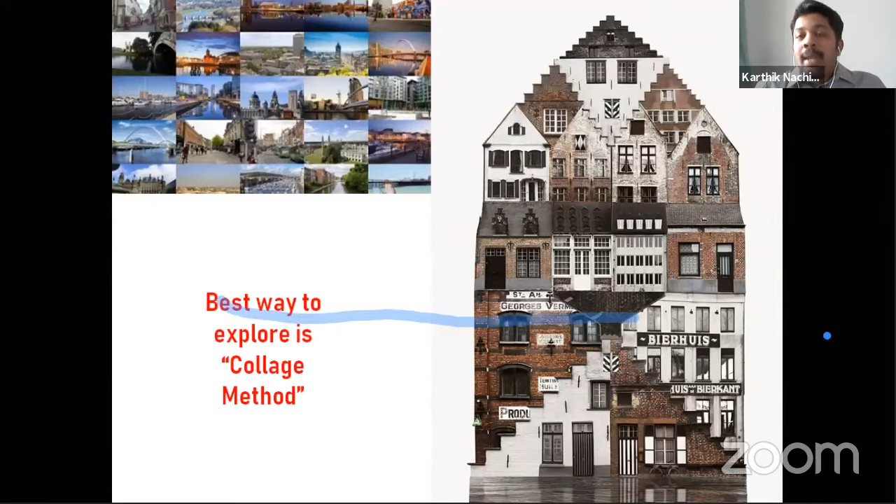What happens is we stay in a 3-star hotel and tend to take their services as a charge. Say, for example, in the morning they provide us breakfast, so we miss out on the cuisine in that country. Then probably they offer us a cab and take us to spots close by, or probably the best spaces they can explore in a day or two. So this is what usual travel offers us. But the collage method can make us explore different ways of understanding a city, and in fact, it makes us comprehend what architecture and urban environment should be.

So today, without delaying, I'm just going to take you to the first city. It's more of a photographic tour, so some of the best pictures I have collated to showcase you. With the time restrictions concerned, I'm just taking you through a quick tour of what I have learned.

Without delaying, the first country I'm going to talk about today is Netherlands, and I guess most of you have been to this beautiful city of Amsterdam. Amsterdam has a lot to offer us, and the moment you get out of the station, this is the first picture you see. Unless you travel by airplane and get to Amsterdam by train, this is the first thing you see.

It's a beautiful Gothic Renaissance revival architecture that the city offers at the bank end. The city is full of water. So once we get down, this is the first spot we see, with this facade with the Pantone color, large windows, spires. It gives us a memory or nostalgia of what Gothic and mid-century Dutch architecture was all about. Then straight away from the station, we see this beautiful tram.

There are many European cities that offer tram services, and one of the best tram-friendly services I have taken is in Amsterdam. Before we explore, Amsterdam is a city you can actually reach by foot, so the first thing you need is a map of it. Especially as an urban planner, it's most informative to get a map to explore a city, or as a tourist as such.

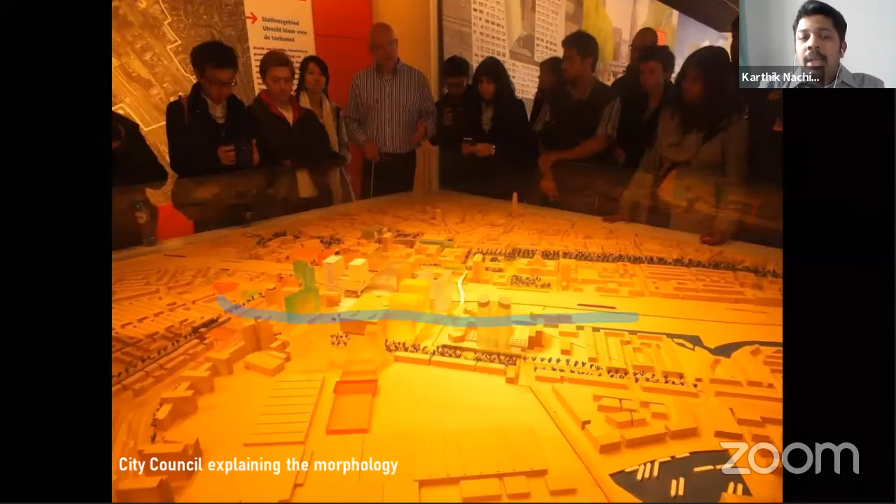So I keep wondering why we have a lot of potential in many developing cities, but we do not produce these kinds of models for someone to understand a city. And these models are kept in the city council itself for public view.

One can never miss these kinds of buildings in Amsterdam, especially in many Central European cities, especially after the Renaissance architecture. More than 16th and 17th century buildings follow this typology, a live-work typology. So this is a beautiful canal picture where I took it. Canals is actually living in Amsterdam. It is a city of canals. Even today, when you see a Google map of Amsterdam, you see water, water, water everywhere.

So this is one such interesting picture. Though the height restrictions are to a similar scale, you could see in the front facade, the picture towards the right, that shows you a group of retail buildings like cafes, pubs, and things like that on the ground floor, and you have residential rental living on the above floor.

This is actually a readapted typology from the previous days of Victorian houses, where they used to have the work or shops on the ground floor. They used to live on the first floor, and the topmost attic usually has the workspace because usually the workshops or workspaces need more direct sunlight. So the top floor usually has the workspace. That typology is being readapted in modern ways.

And the picture towards the left shows you a beautiful view of a canal, and especially those arched colonnades you could see towards the bottom are basically the entrances to the warehouse. This is where people used to stock their goods, especially coming from the sea waters. It gets into the canal system and gets to individual parts of the house. And you can also see a lot of boat parking areas close by. So this is how Amsterdam is.

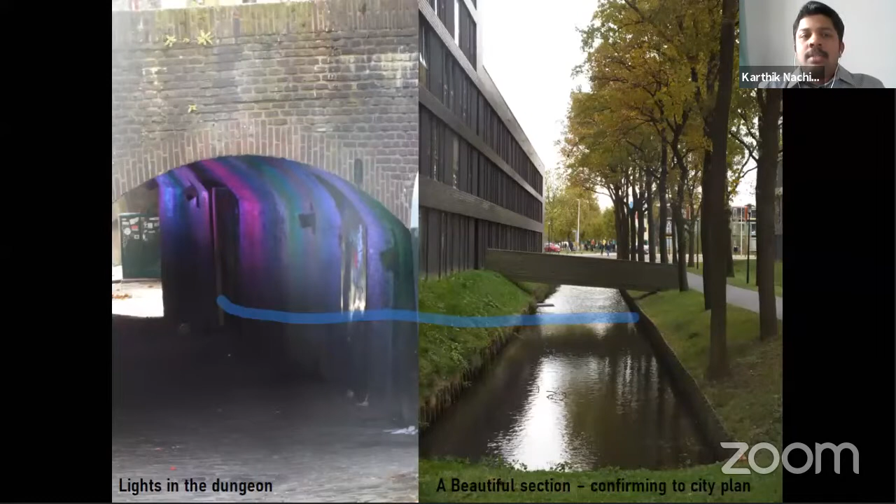Not to forget, the picture towards the left is a beautiful way that the city municipality takes into consideration the smallest detail, nothing but to make people feel secure in every place. Because of a lot of canals, there were a lot of underpasses and overpasses that were created, which means that there are a lot of residual spaces left. So even for a single citizen not to feel insecure about the environment, the city council has lit most of the spaces and made it more artistic so that everyone can go through and walk through all the environments.

And the picture towards the right is still close to my heart, because in urban planning, we used to say that most of the campus and master plans can adhere to what the city offers us.

So we know that the city of Amsterdam offers a lot of canals and bridges. If you look at the picture to your right, there's a beautiful building, and a street to the left, connected by a bridge, with a small stream of water running below. It's an architectural or urban representation of the city's morphology, taking into consideration city planning inferences and incorporating them into master or campus planning. This picture was taken at the Central University of Amsterdam.

When we talk about historic districts, Amsterdam doesn't just present historic buildings, but a lot of eye-catching, astounding landmarks, especially along the Dutch waters. One could never miss, at the rear side of the station, this EYE Film Institute created by the Austrian architects Delugan Meissl. It's a white building that opens its mouth to engulf the Dutch waters, a beautiful expression of how a building responds to its waterfront, with a nice balcony that slopes down with a ramp towards the water. The building has a lot of connection to its environment and surroundings.

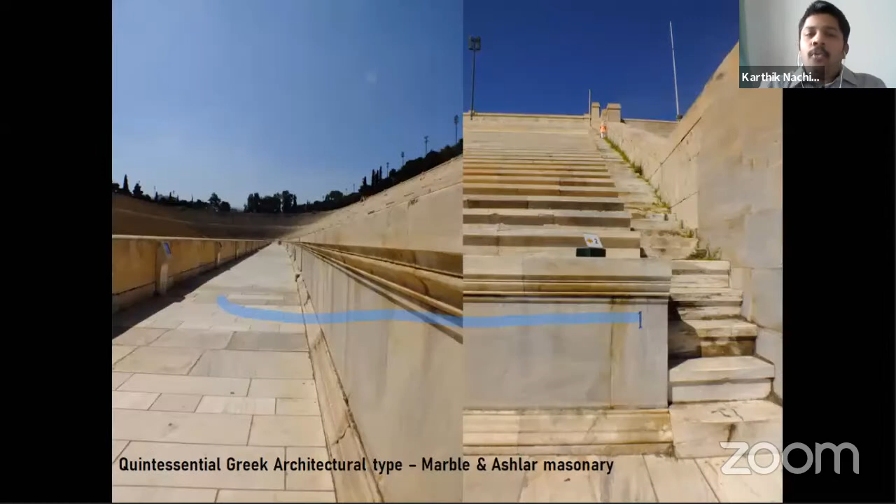Of course, the architecture of it is more white marble, ashlar masonry. You can see two tiers, and there are some steps taking you to different tiers. This is more of a Greek architectural type, dressed stone masonry. You can see the number of stands or tiers written in blue color, basically azul, which is again a material available from a nearby local source. The architecture was splitting the entire tiers into two.

There is one aisle running in the 23rd row that splits the tiers into two. In the right image, you see a staircase that goes upright. There are totally 18 different staircases similar to this, which means there are a total of 30 stands in this entire stadium. The 30 stands had a capacity, 2000 years before, to host 50,000 people. That was quintessential in number.

When talking about Greek and Roman people, we cannot forget the social pyramid they created, from the king and queen to nobles, priests, and till slaves. Even the seats were designed in such a way — you could see a lion-shaped leg with a floral motif, and a royal armrest. So you can see the seats are distinct from the others. There were different seats like this, even for people who came from other countries.

The princesses who came from other countries had designated seats like this, and above them were nobles, then priests, and so on. So based on the social hierarchy, the stands were organized. Architecture and social structure go hand in hand.

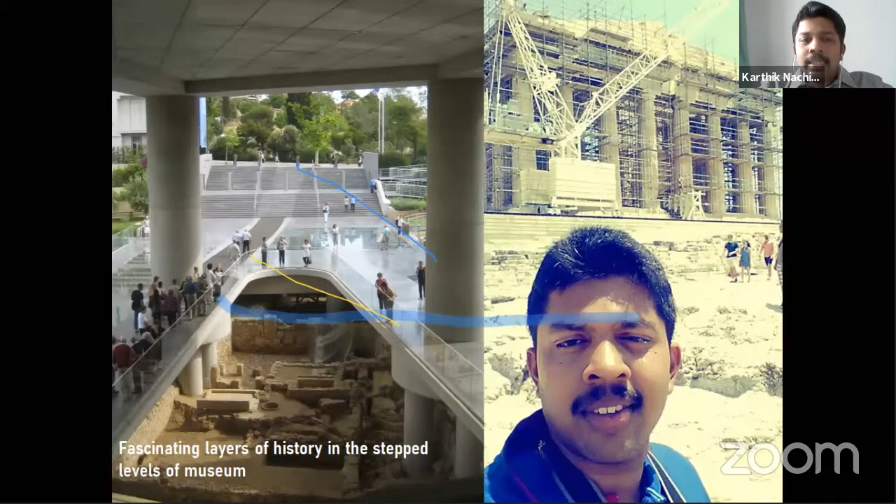So the one towards the left, you can see a picture of a cascading step.

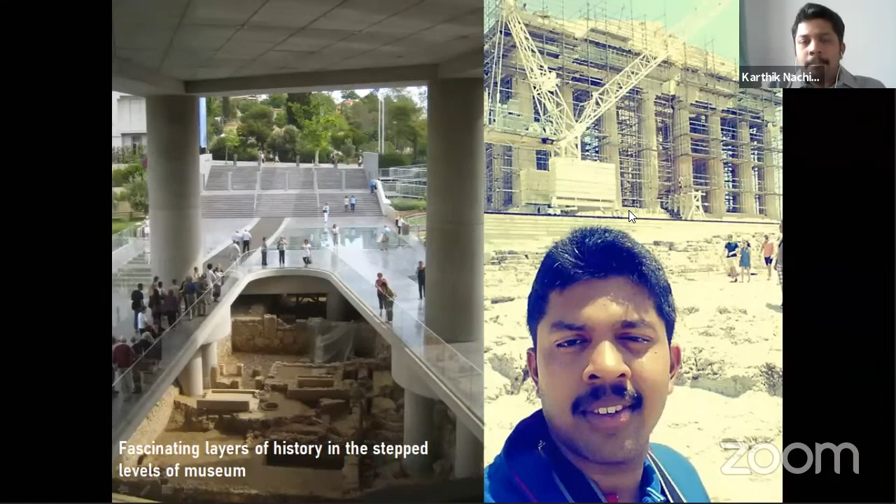This is the view from historic Acropolis. Of course, when a new building comes up, it has to correspond and extend its view towards the main temple, so you could see the hill of Acropolis right next to it. This is a picture taken from the topmost terrace.

This is one such experience of an active volcano in the municipality of Thira. Imagine a five-dimensional experience of earthly vibrations where you can actually feel the heat there, walking on top of an active volcano. Such a beautiful experience nature gives us. The volcano erupted around 1953, and its status is still active, meaning it can erupt anytime. When you walk around the entire island, you feel the earthly vibrations.

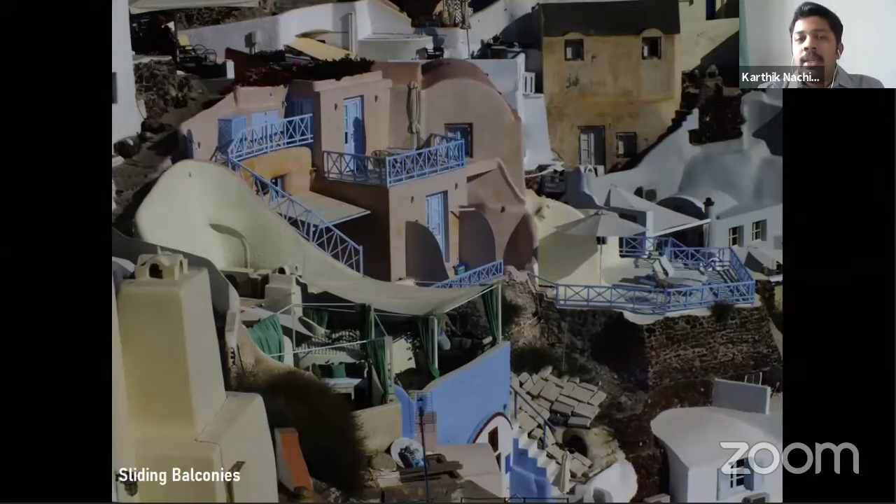In the era of social distancing in apartments, we often just bump into each other visually. But this beautiful city has crafted a kind of physical and social distancing, yet maintaining good visual communication with many people. You can see balconies of different houses that are interconnected. It is so lovely to see how many people interact with themselves in these cliff areas without even moving to the next place. I think it's probably easier to transcend from one house to another through the balconies rather than going by roads. It's much easier. So this was one good picture that was captured.

Now most of the houses are being converted into hotels, available for you to stay. So some of these scenic houses can actually be rented to stay in.

All I had shown is just a limitation of the island, but the architecture of every house is unique. The courtyards it offers, the self-shading techniques, the streetscapes - everything is so beautiful that has to be experienced by walk. But for people who cannot walk, there were also mules or horses that take you up the hill.

So some of the takeaways I took away when I left was a country so willing to preserve its heritage, its legacy for 2,500 years, so that even today someone can feel that history. That is so astounding for someone to experience.

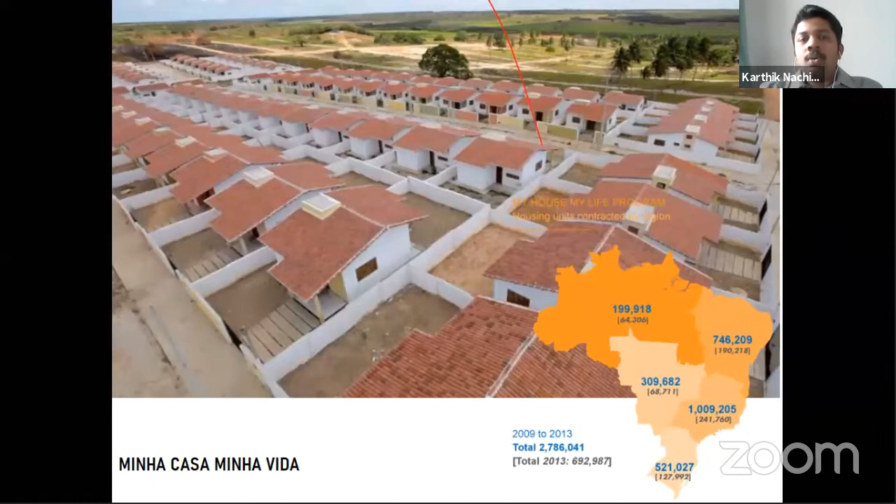It's a group of houses, and only houses. So what the federal government started to realize is, if we just build housing for the community, what more is there? How can we create diverse environments was the question pondering over them. That is when the workshop was invited, and a lot of different architectural schools were invited to look upon developing the environments. All these were basically focusing towards low rise, single-story buildings and low density, so how could we get high-density buildings was again thought of.

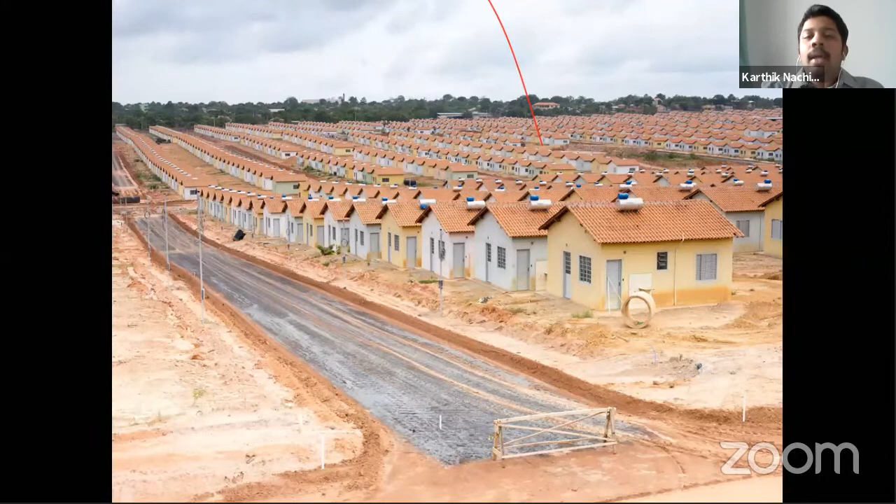So some of the slides I am showing you are part of the workshop that we did. This was the main area or settlement of study in the center, flanked by water bodies on either side - the Beberibe River and Capibaribe River. So there were two rivers like our Nile, like our fertile civilizations, and these also had the opportunity of waters to be tapped on.

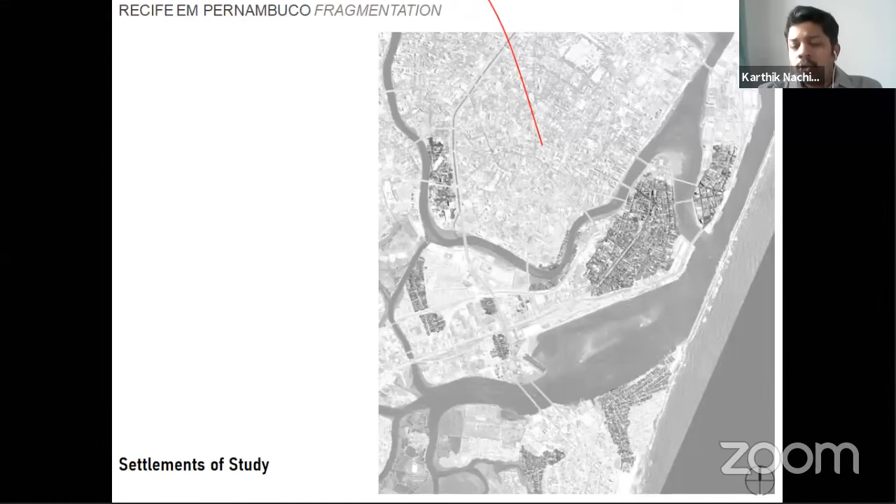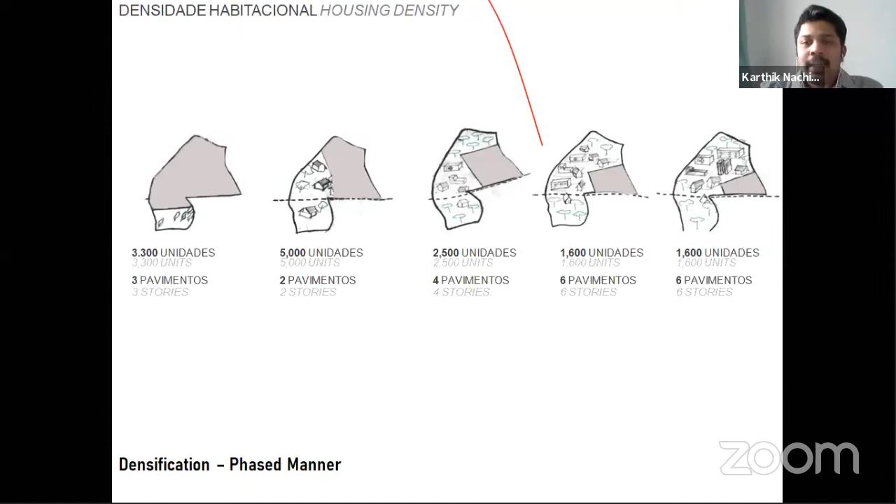So the strategies we were working on and looking forward to densification - and densification cannot be done in a whole manner, right? It has to be done in a phased manner. So the densification based on number of units, based on income groups, was studied, and it was done in a phased manner. That was one of the strategies we used. And second, when we talk about waters, the urban fabric was more fragmented.

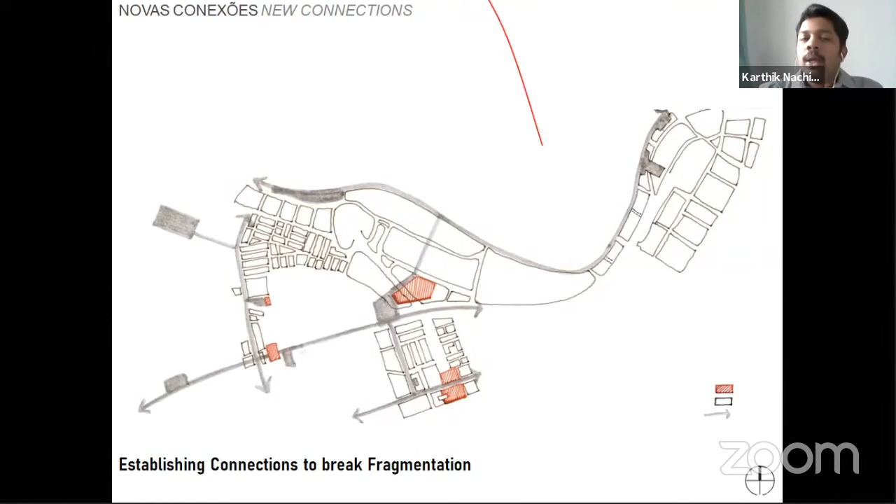So what to create, how to create new connections so that the fragmentation should be broken. That was the next strategy that as urban planning students we were looking at - how to break the fragmentation, how to connect the different parts of the urban fabric.

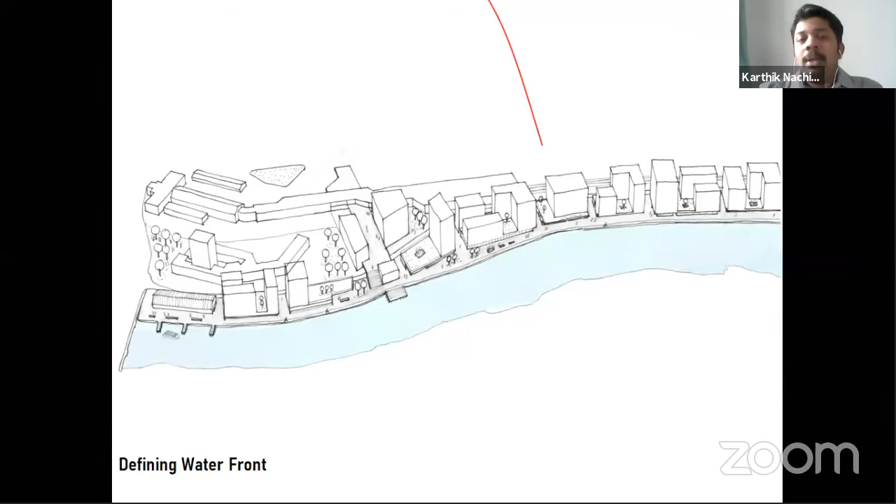And of course, when there is water, you need to define the waterfront, right? So that was another strategy that was taken. Water is a source where even water taxis could be invented. So defining the water edge.

And the last strategy, of course, was housing typology - working on different housing typologies, especially incremental in nature, so that it is also promoting densification of every neighborhood. So housing is just not a commodity; it is more than a shelter.

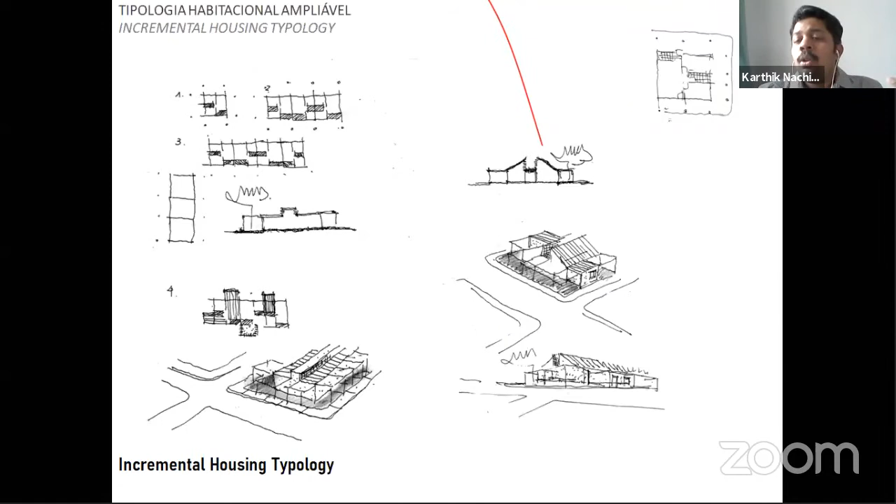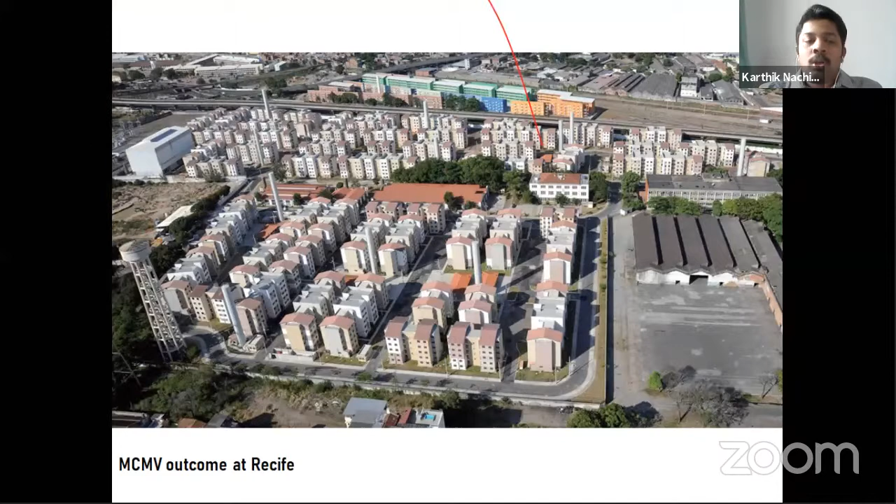And some of the outcomes at Recife were high density blocks that came after. A mixed use typology was created to involve EWS, LIG, MIG, and some HIG housings were also built to cross-subsidize what was lost. So there were unique things that were invented, and the density also went up. One such project also offers some recreational amenity for the Brazilian kids - they had parks within the space so that they also have a source of active recreation.

And the last experience I want to show today is about the LLDC experience. This is more close to my heart. Though London has a lot of things to offer us, many people should have been to London as well. But something close to my heart was the London Legacy Development Corporation experience. So at the end of Olympics 2012, London had a major pressure to revitalize its eastern area.

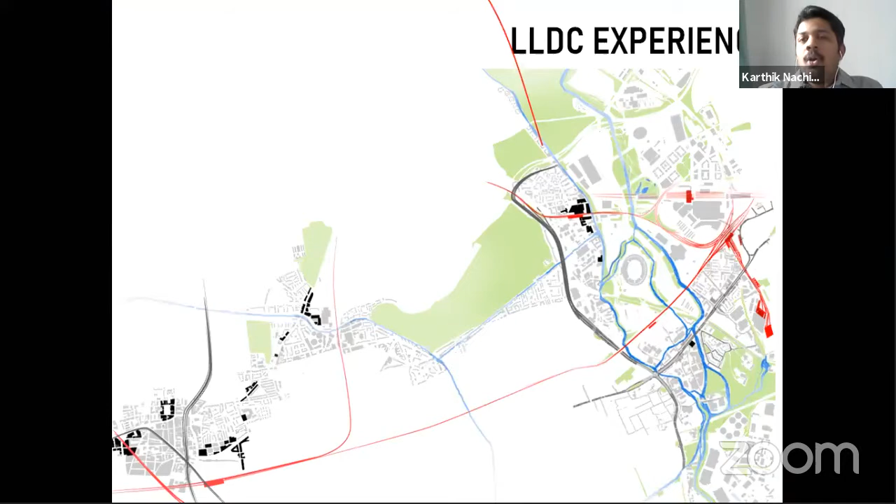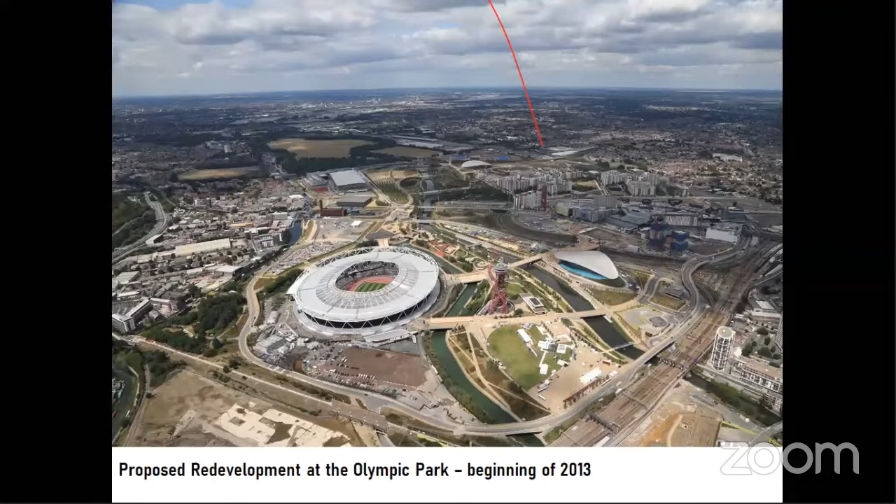So now the Olympics is over. What will happen to the area next was the question. This was the area after the Olympics where only the stadiums were built - nothing around it was developed. So the major question was how this could be developed. This was the major reason why the London Legacy Development Corporation was initiated.

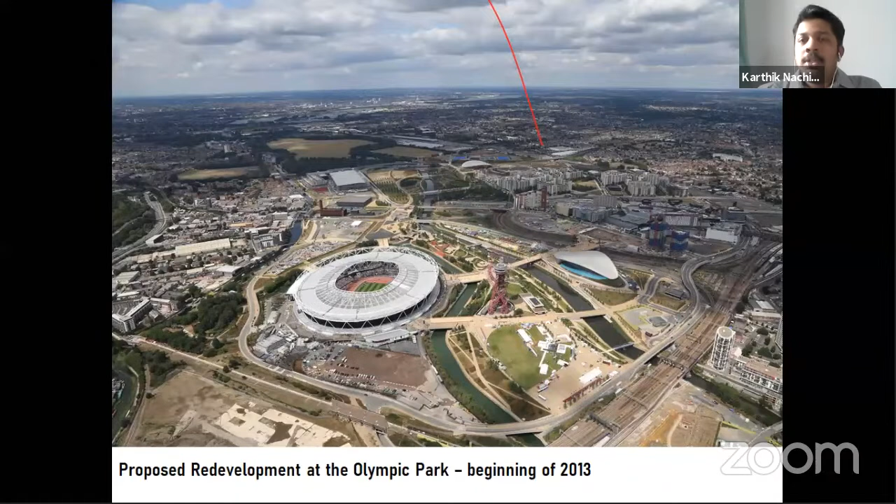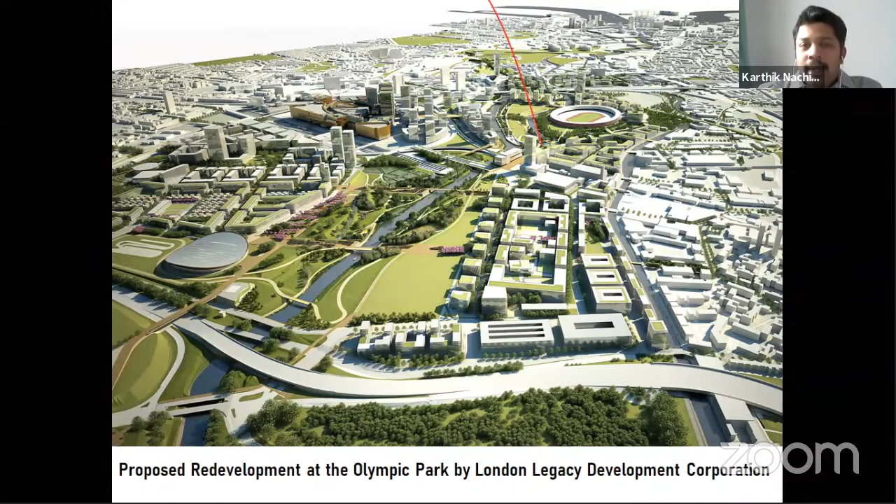The major thing that was done is to densify this area, to create more housing, to create more retail, and to create a more diverse neighborhood. This was the proposal finally given by the corporation to revitalize the river, to create more urban districts that are more intact, to invite institutions to take part so that there is institutional growth inside, a more artistic community to be developed, and the stadiums were retained so they can still be used as stadiums. So the remaining part of the community was developed.

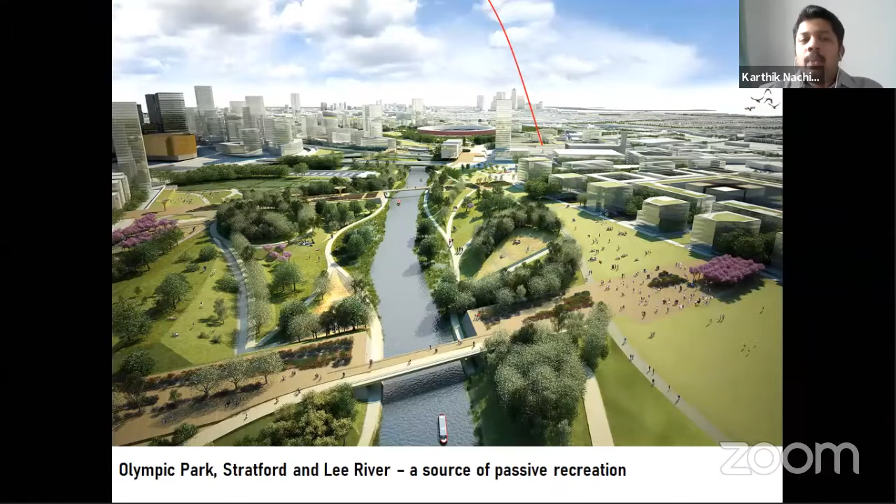This was the Lee River, a source of water that runs across the neighborhood. This was completely revitalized as a source of passive recreation, maybe a heart for these people to have picnicking, bird watching - all these kinds of passive recreation was done. So even today, the neighborhood of Stratford has a lot of implications, a lot of new interventions that have been done in this past 7 years.

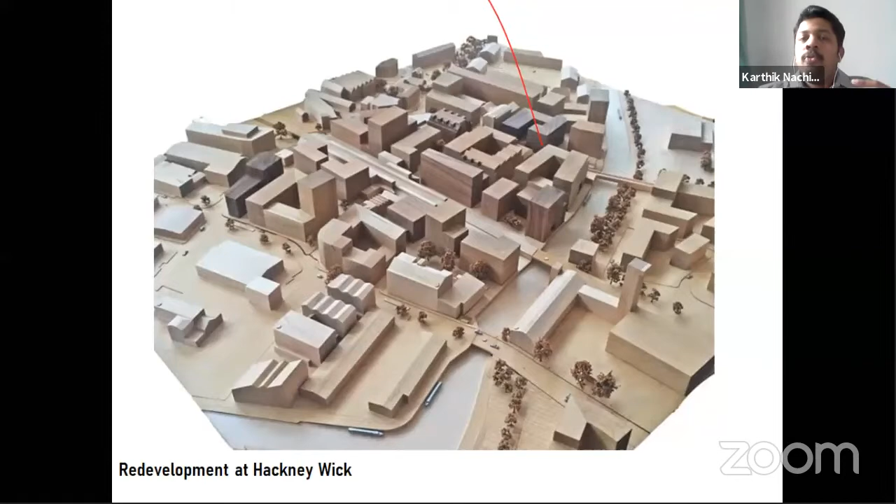Everywhere around these districts, you can see only artworks by street artists, so it's a more thriving artistic community that was existing. This was the proposed redevelopment in the form of a model. You can see the water running in between, and they were creating a mid-density, mid-rise kind of environment.

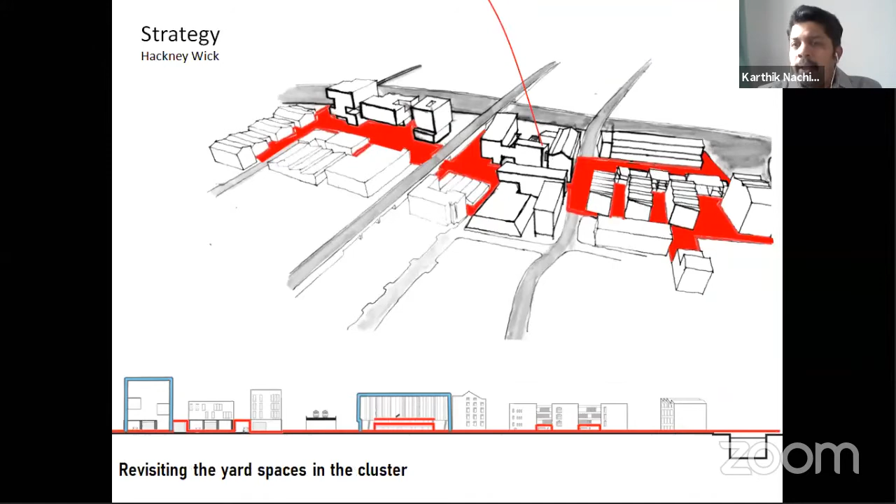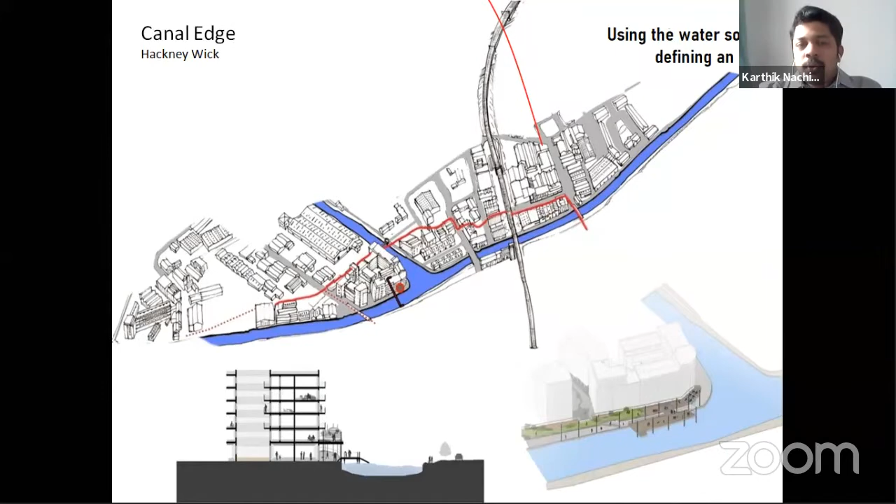Next was using the water source to define an edge. Whenever there is a water edge, the citizen has to get to the water to get the reality or feel of it. So the canal edge was treated. Now, after the treatment, a lot of active rental spaces like cafes have come up. It is more sparkling now, more active, more activated next to the water. Imagine how pleasant it would be to sit next to the water and have a cup of coffee. So it's more exciting. This is how it has regained its lost importance.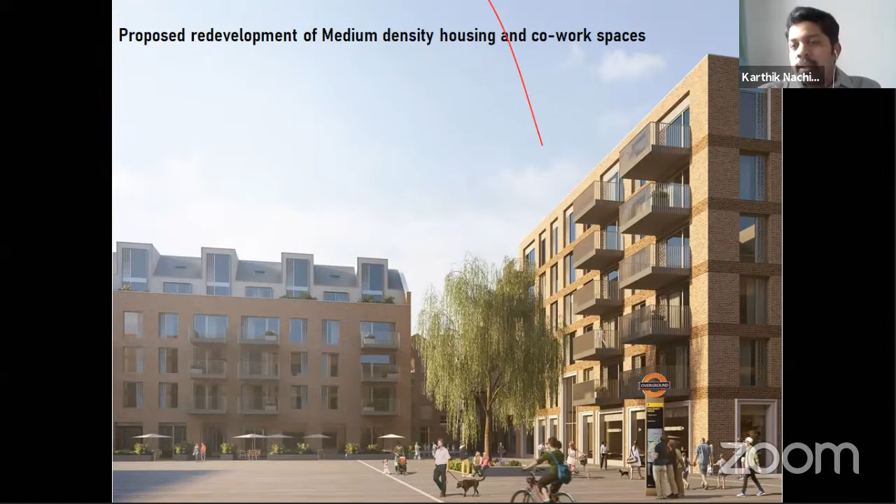And these were some of the proposals of medium density and co-working spaces. So living was introduced next to stations - when a station is redeveloping, more people want to live close to railway stations. You can see a lot of co-working and living spaces, and also the traditional London loft structures, with heights restricted so that housing policies were adhered to. So these were some of the pictures. Towards the right bottom is the new Hackney Wick station, the redevelopment that happened.

Towards the left bottom is the cafe space that was recreated, and towards the top is a place for co-working spaces. A lot of people were encouraged to use this space because the rental was a bit low. Compared to central or West London, the rental spaces over here for co-working and many things were low, so people can actually afford it. This was the way the master plan involved a lot of people to actively use it by reducing or subsidizing the costs involved. So many people actually started to use it.

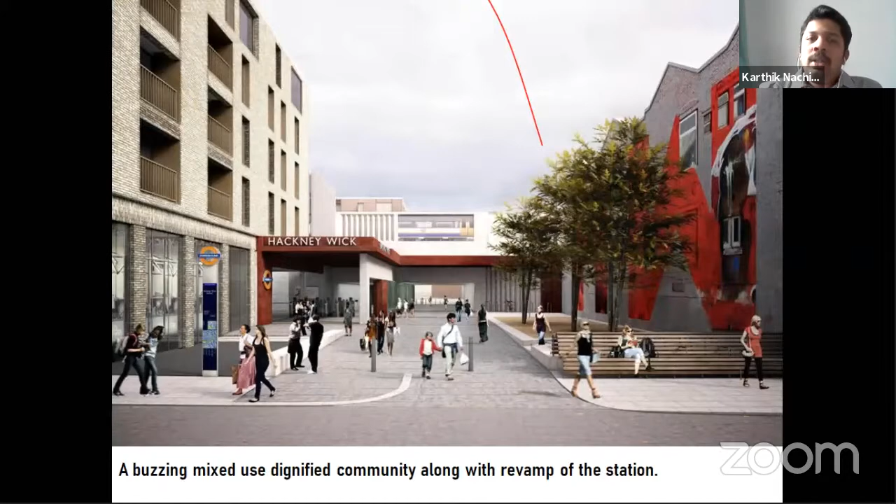And finally, the end result was a buzzing mixed-use and dignified community, along with a kind of revamp that was done to the station. The old station was renovated to get a new and contemporary look, but still the artistic community is thriving. So that's what was basically done with the LLDC, and works are still going on. Every city is improving, every city has its own challenges, so they have different ways of tackling their own challenges.

So looking at this, what I had understood is my travel has increased my love for cities. Through my travel experience, I understood that every city has a lot to offer. Maybe many people travel for religious reasons, people travel for work, people travel for culture, people travel for business, people travel for leisure - all these are an integral part of the city. Every city has its own challenges, every country has a lot of things to offer. So my travel increased my love for cities, and we started to focus on educating people through travel experience.

And as a result of that, we ended up starting this organization called UrbLab, an organization that caters and gives the experience of cities to kids, adolescents, adults, and through institutions and other forums. So we make people experience the city through our lens.

We give them a complete experience of cities, what a city offers you in terms of religion, culture, cuisine, architecture, and urban environments. We've done over 15 tours since 2017 with architectural institutions, schools, foreign nationals, and many individual travel lovers. Our trips also focus on learning and experiencing culture, architecture, and urban environments. Of course, having a practice, my travel has also increased our commitment towards the community.

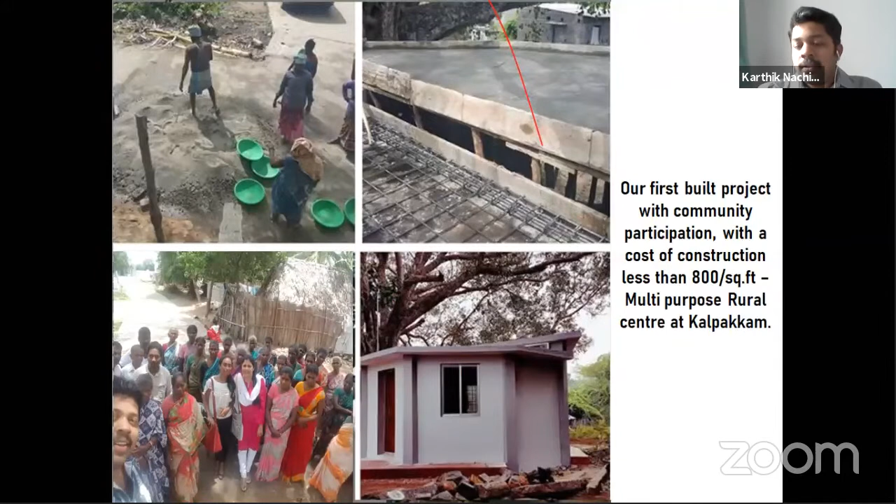All these takeaways are from my travel experience on how community participation was done in many projects. A lot of South American cities have this in practice, especially African and South American countries, involving the community in building their own structures.

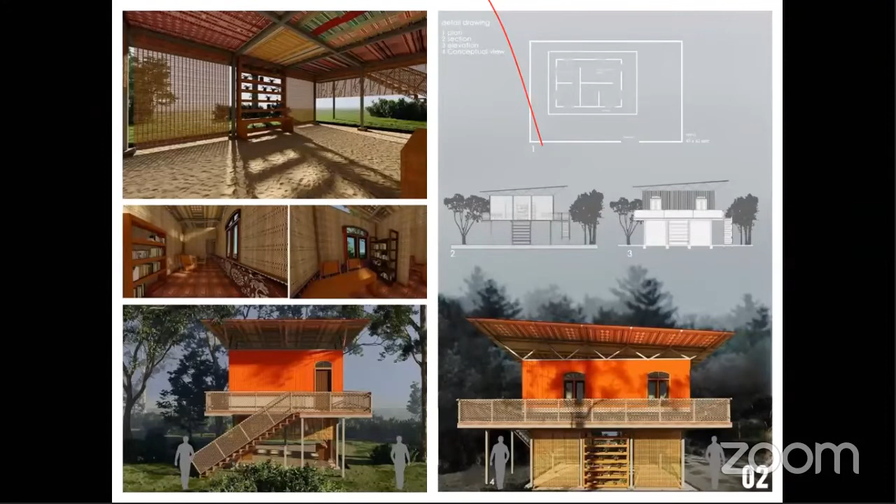So this is one of our recent proposals, a corporate social responsibility project. This is a kind of stilted bamboo structure where we focus on creating a stilted structure on the ground that offers more of a vertical garden type, and the top floor is a flexible environment that supports multi-purpose use. This is developed as an urban insert inside slums, deprived areas, or maybe in a rural context. So we are starting to focus on creating prototypes to fit in urban and rural contexts as well. This is one such prototype that we are working on.

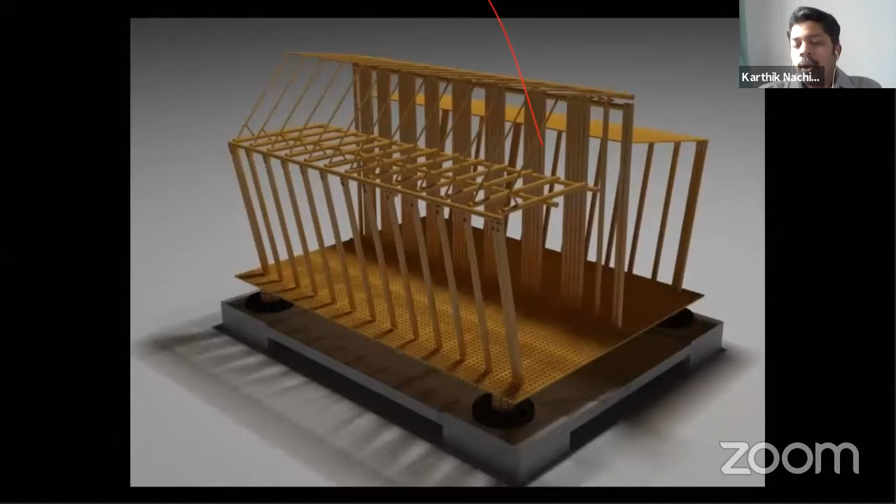And this is again bambootecture, what we call. We are working on a completely floatable or makeshift structure made of bamboo frames with tire foundations and bamboo mats, so that it creates a kind of living condition for deprived people. This is one more research that we are focusing on and trying to build a prototype, completely made of bamboo frames or any other recycled material.

This is one more proposal for a CSR project, focusing on a learning environment in a rural area, where we focus on closed and open learning. As we move forward through the ages, we totally forgot what was the open system of learning, or the Gurukul system of learning. And as we progress, of course, we need computers and modern technologies as well. So this is a kind of rural center that fits both.

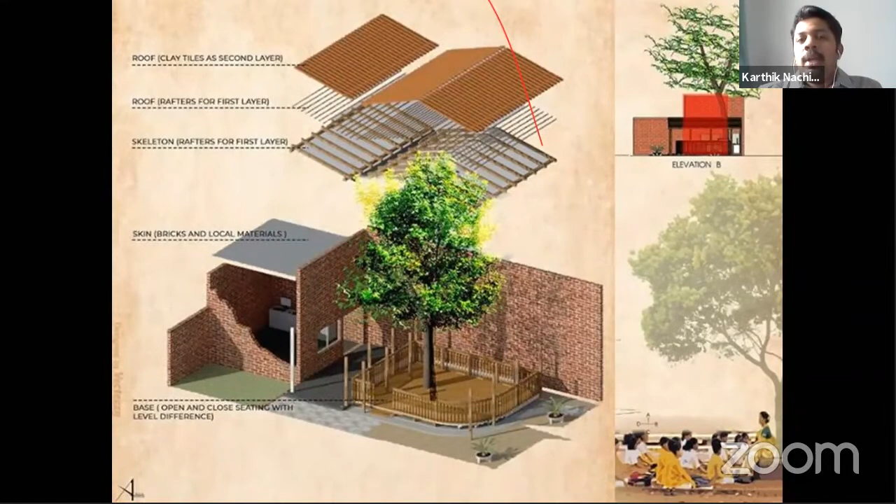Towards the left, a wall divides the open and closed areas. Towards the left, you could see a small box where you have computers and a closed learning environment. And towards your right is a tree where open learning could be, just shaded so that an open learning atmosphere could be created. So it's a kind of dialogue between open and closed learning that we're trying to propose.

And of course, who can miss a container office structure? So we are also working on expandable containers. We believe that the future of rental spaces will definitely depend on container architecture, maybe not now, but maybe 5 or 10 years later. There are thousands and thousands of shipping containers left derelict, not put to use, so being responsible, we need to take this into consideration.

So we need to create prototypes on how different atmospheres can fit in. There are a lot of container structures around the world used for residential living, but looking at our context, people might not be willing to stay in urban areas in a container structure. So probably expandable container office structures might be the future of offices.

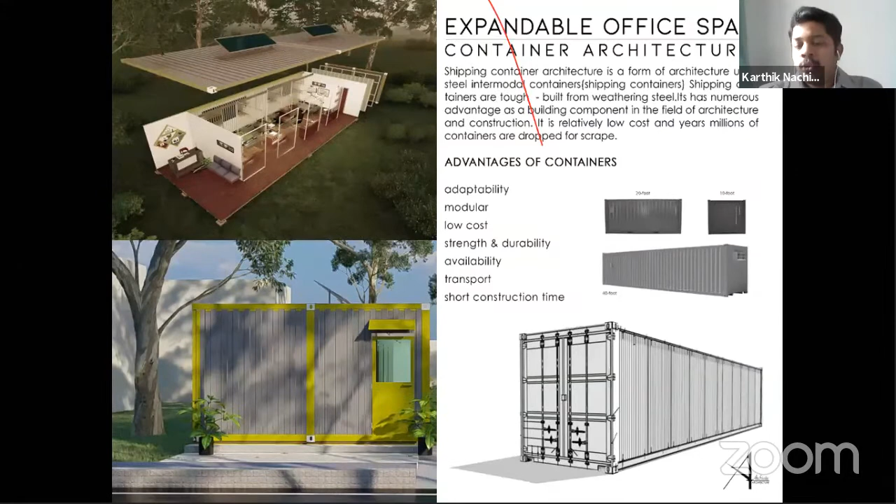So we are working on a focused research which has some advantages as well. It's modular, adaptable, and also flexible. So that was one thing.

So we are working on a focused prototype of a cloverleaf model. These are some of the commitments. Through travel experience, we've got a lot of things about what many countries, cultures, people, and city governments work on. Through those takeaways, we are trying to make a small contribution, even though all these are at a nascent stage, probably these might be the need in the future. So things are eventually developing. A lot of things the city can offer to us.